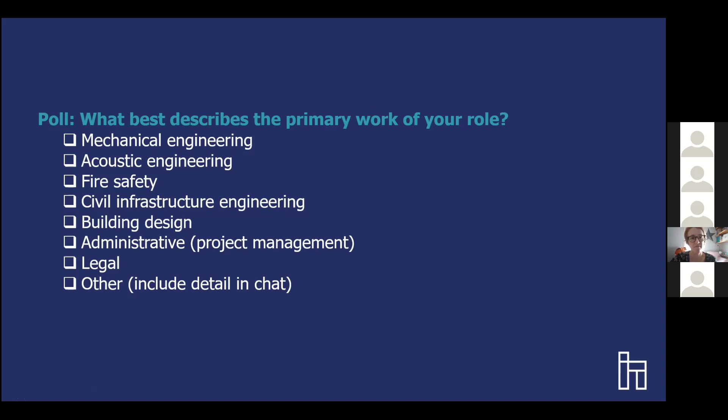I think this group probably knows the importance of focusing on buildings globally. Emissions from buildings and building operation represent close to 40% of greenhouse gases, but in urban centers like DC, where there are more larger buildings and more public transportation options, buildings represent a much larger share. We can see that in the district, this is 71% of emissions come from buildings.

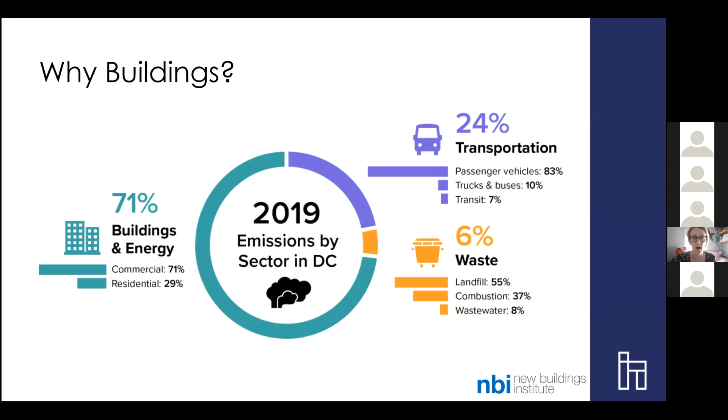Under Clean Energy DC, the district is committed to reducing annual greenhouse gas emissions and energy consumption by 50% and achieving 100% of its energy derived from renewable energy resources, all by 2032. Additionally, in December of 2017, Mayor Bowser further pledged that the district would be carbon neutral by 2050.

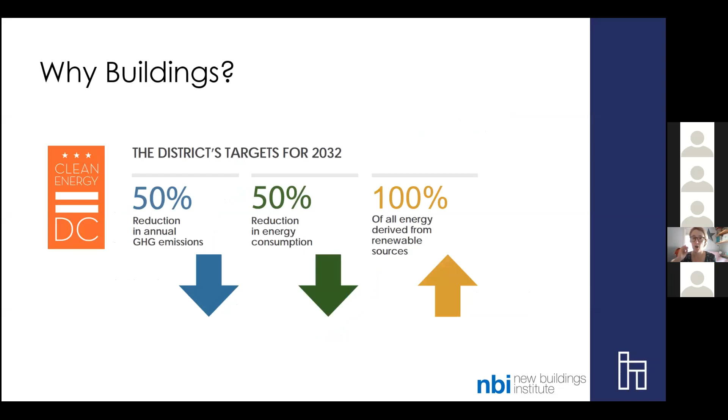30% of the projected greenhouse gas savings by that timeframe will come from building-related initiatives, specifically actions that require efficient carbon neutral new construction and expansion of deep energy retrofits. Exactly what we're talking about today: the combination of new construction codes and building performance standards.

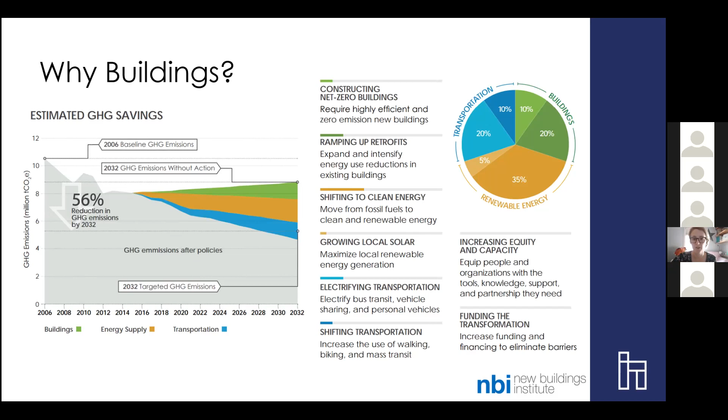The effect that the district and other jurisdictions, including now the federal government, have had in setting these sort of targets and goals has put an additional emphasis on talking about emissions in buildings, meaning that things like building codes and building performance standards are becoming mainstream and people are more aware of the impact that our buildings have on climate.

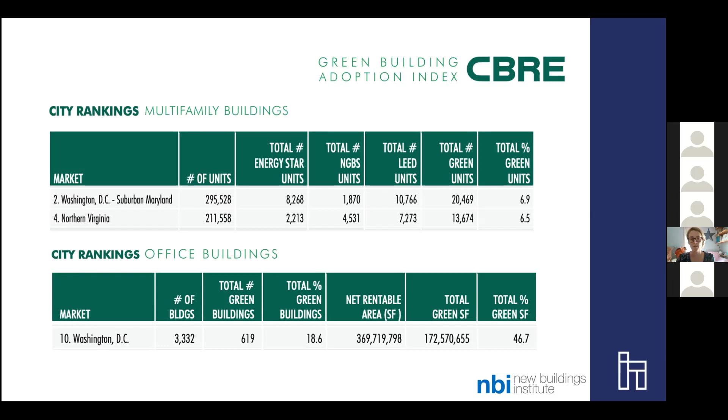We know that DC is already ranked as a top market for delivering high performance buildings. CBRE's annual report ranks DC and Northern Virginia second and fourth among top 30 cities in the country for green characteristics in multifamily buildings and 10th in office buildings. So not only is the regulatory infrastructure now in place to require high performance buildings, the market is used to looking for these criteria already when buying and leasing. So building owners who are asking for what their customers are demanding are going to increasingly be seeking those high performance solutions in buildings that they're purchasing or constructing.

So we know that the DC Energy Code applies to buildings as they're being planned and constructed, and that benchmarking and BEPS laws apply as soon as the building is delivered and reaches an occupancy threshold. A new building becomes an existing building as soon as it's built. So if you're required to benchmark, you need to start benchmarking the calendar year after receiving your CO.

And once a full calendar year of utility data can be collected, after a full year of benchmarking data has been reported, a new building will be required to meet the standard at the beginning of the next BEPS period. So this will be slightly complicated if we're talking about multiple buildings, but if you map a single building that you're constructing against this, then you should be able to map out those calendar years pretty succinctly.

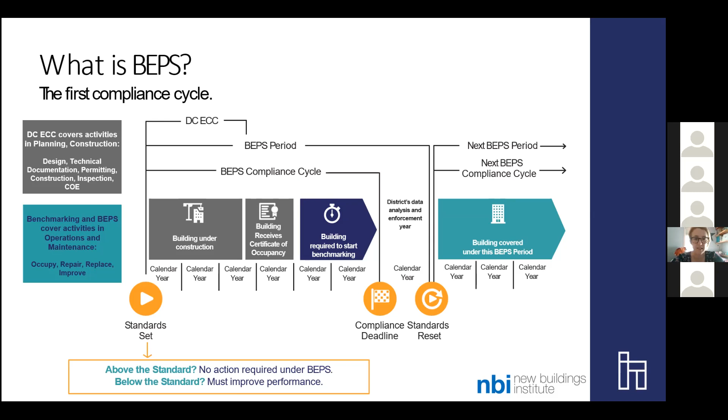DC Energy Code, right, in that first step. The DC Energy Code is a package of new construction codes that govern what's required in our new construction. Energy Code provides specific requirements for energy using systems in buildings. There are 3 paths in the Energy Code: the prescriptive path, modeled performance path, and alternate compliance paths.

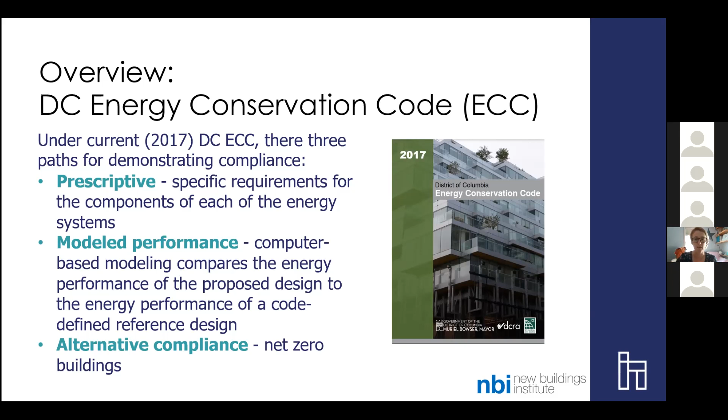Today, we're just going to focus on the first 2, not the alternate compliance paths, because they involve third-party certification. That's sort of out of the scope of this discussion, but the same types of application and consideration in either modeling or selecting prescriptive requirements could be applied to those paths as well.

At the highest level, the new Energy Code, the 2017 DC Energy Code, is built on top of 90.1, 2013, with amendments that were derived from the previous version of the Energy Code amendments that had been in place, as well as ASHRAE's 189.1, focusing on the energy consuming portions of that. The previous DC Energy Code was built on the 2012 IECC, again with some significant amendments.

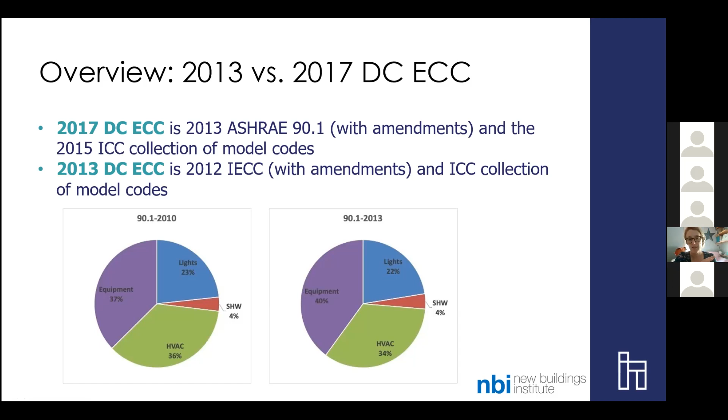The biggest thing to note in terms of building performance standards here is that when you compare these 2 Energy Code pies, what you'll see is that between the 2 code cycles, there's a 3% increase that I want to note in equipment. This is equipment and plug loads. As much as we can control lighting, water heating, air conditioning and ventilation in design, there's little to almost no way to control users during the design phase. So this, what was 37% and is now sort of 40% nationally across all buildings, is a really big opportunity for BEPS compliance that's going to have to happen after construction.

So the next piece along that timeline, benchmarking. DC was the first jurisdiction in the country to pass the benchmarking ordinance when it adopted the Clean and Affordable Energy Act in 2008. The law requires that large privately owned commercial and multifamily buildings and district government buildings benchmark their energy and water consumption using Portfolio Manager, reported to DOEE annually, and then the data is disclosed publicly.

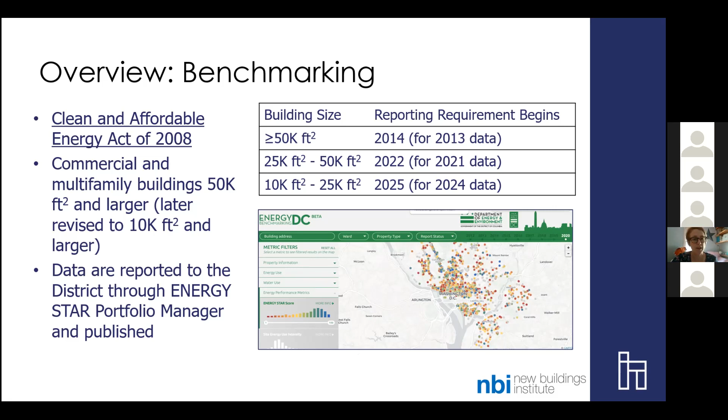And they have put out a series of maps so that you can sort of track Energy Star score by filtering by different metrics and compare yourself to your peers, or just understand where your building is, or if you just love maps.

Similarly, the building performance standard thresholds have been built into sort of an interactive interface. BEPS is a minimum energy performance target for existing buildings that is legislated to be no lower than the local median Energy Star score by property type.

Oops, went too fast. The district has, again, published this map. You can dive in. Right now, we're highlighting DC Hub's building, 1707 L Street, an office building constructed in 1960. The median Energy Star score for office buildings we know is about 71, and this building specifically had a score of 84 during the baseline year of 2019.

So by exceeding or meeting that Energy Star score, this building is considered compliant during this first cycle of BEPS and does not currently require any additional action.

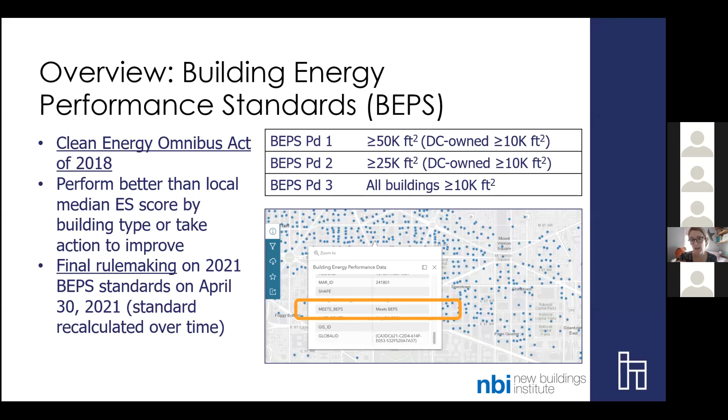Okay, so how are we going to try to figure out where the new construction might hit on a building energy performance score? What NBI did to try to figure out if new construction would be guaranteed to meet the building performance standard is we did 2 analyses.

First, we took the benchmarking data from the district and scrubbed it for data that we thought was usable. If you all have been benchmarking, you know that sometimes things get misreported. So we tried to take out buildings that we thought were either misreporting or had been missing a meter or something like that.

Based on having worked with some of this data before and other pieces of analysis, we mapped the site EUI, the source EUI, and the Energy Star score of those buildings. This graphic shows multifamily buildings that we think were built under the 2013 Energy Code. The way we chose that was we picked a construction date as a proxy. So construction dates between 2015 and 2017 were selected as that proxy when we completed this analysis.

And this is what it looks like. So what this graphic shows is that, broadly speaking, there's an inverse relationship between site EUI, source EUI, and Energy Star score, which we sort of expect because the Energy Star score is meant to estimate energy performance of a building, normalized for weather and other building characteristics. The lower the energy use, the higher the Energy Star score.

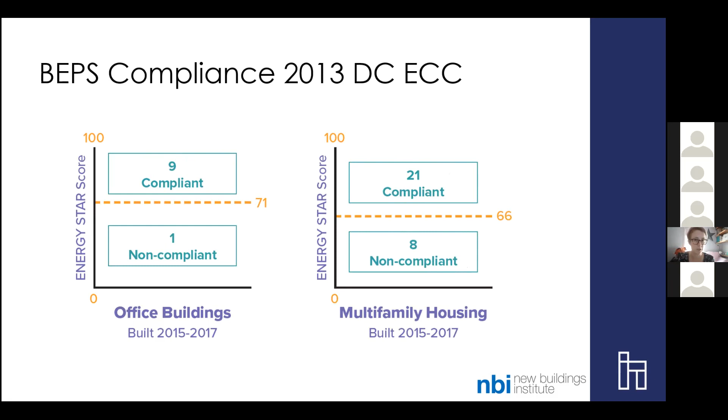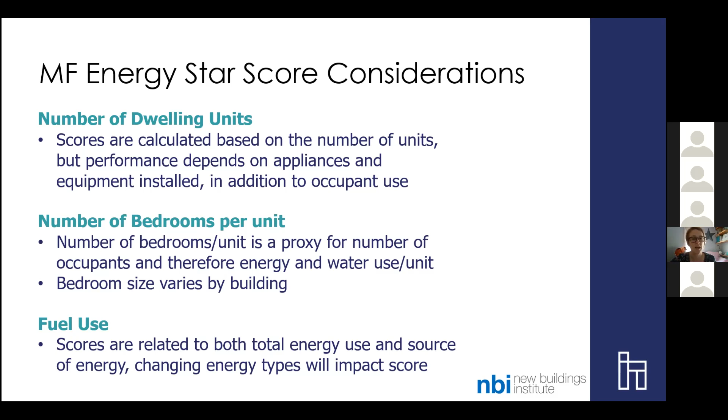Then we dove into the Energy Star considerations. The Energy Star score is based on an equation. It includes number of dwelling units, number of bedrooms per unit, and a little bit on fuel use. So your fuel use will impact your score, whether it's derived from natural gas, electricity, or on-site solar. All of those will change the score that you have.

So again, this is that same graph that I showed you before, again targeting that BEPS median of 66.

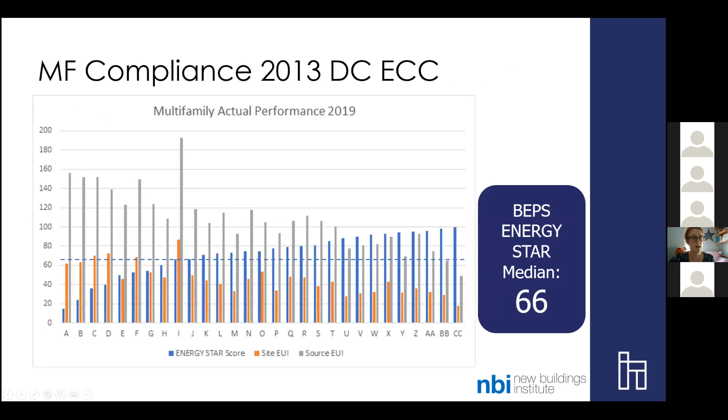And then we ran a test against what we thought the 2017 Energy Code would deliver. This is based on analysis completed by PNNL. Instead of looking across multiple buildings, because we did not have multiple buildings at this time, we took the PNNL analysis and changed the variables that Energy Star uses to normalize its scores. What we got was a variety of scores that may apply to a code constructed multifamily building.

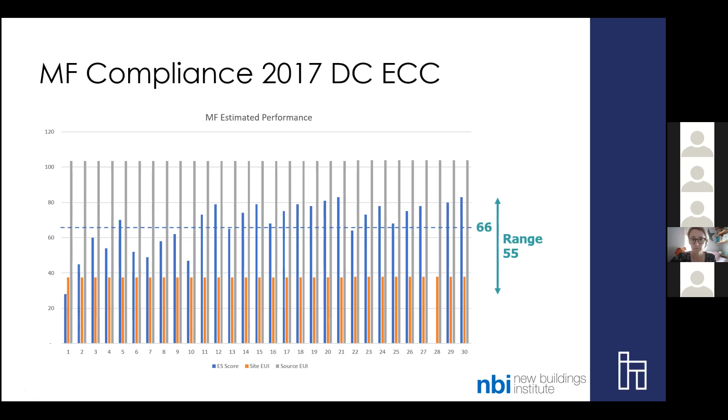You can see here, again, this is the 66 that we're looking for, and we have a range of scores of 55. So we go from a lowest score generated of 28, to the highest score generated of 83, just by adjusting the factors that Energy Star uses to normalize its data.

So what we did was a couple of things based on the PNNL assumptions that went into their analysis: the size per unit, and how many bedrooms. We also used a series based on Energy Star defaults, which we do not recommend you do for design characteristics, but for this type of analysis it made sense to change those variables.

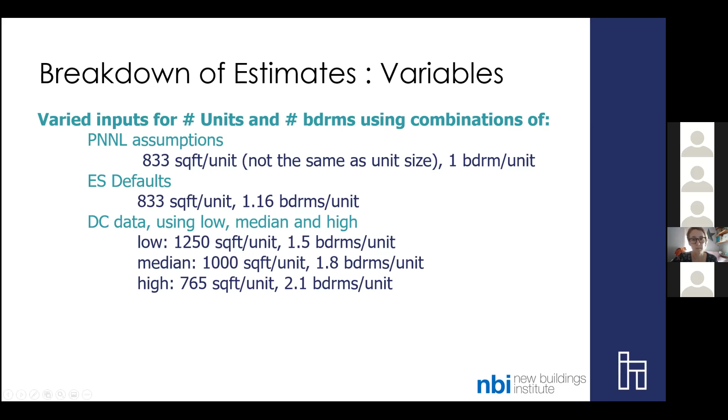And then we also broke down the DC data. So we used the DC data that exists, a low number, a median number, and a high number in terms of size of unit and number of bedrooms per unit.

Then we went through a similar piece with offices. Energy Star considerations for offices are a little bit different. Obviously there's no bedrooms, no units, but they have weekly operating hours, an occupancy number, and a number of computers, which plays into that plug load conversation. And then again, fuel use.

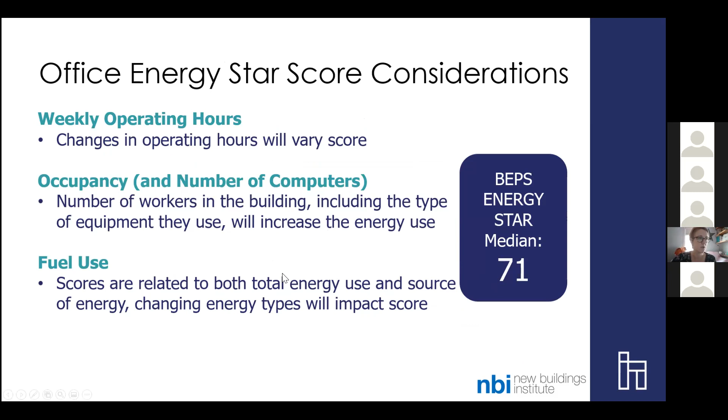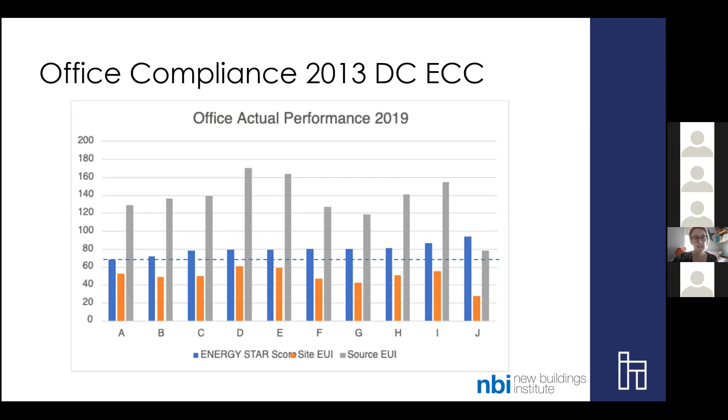So now we're targeting that Energy Star score of 71. Again, this is the existing buildings that we estimate were built to the 2013 DC Energy Code. We ran a very similar type of analysis to try to estimate for offices what the scores might be. In offices, we ended up with ranges much tighter together based on those variables present in the Energy Star calculation, a range of 16, with scores varying from 70 to 86.

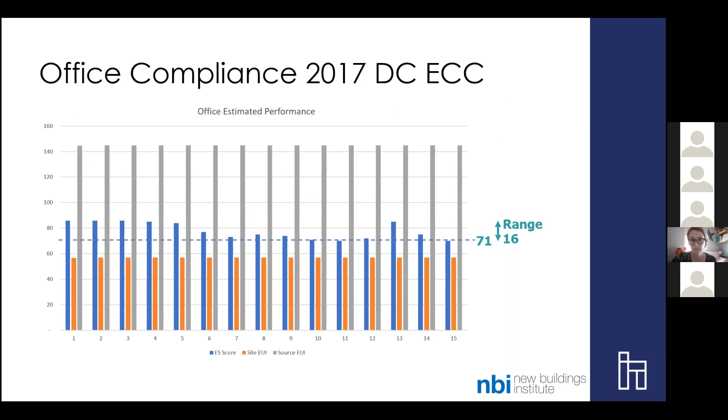Quick review of the estimates we're looking at here: we took the PNNL assumptions for operating hours and the number of square feet per person, and then we took the DC data, low, median, high.

The other piece I'll caution here is square foot per person. We started this analysis at the beginning of the time of COVID, and we know this variable specifically may not look the same going forward as it has in the past. But at the time of the analysis, instead of speculating about what office allowances would be for square foot per person, we decided to just use the historic DC data. The market will need to sort itself out, and this variable will need to be taken very seriously if there's a dramatic shift in the square feet per person allotted in new office designs.

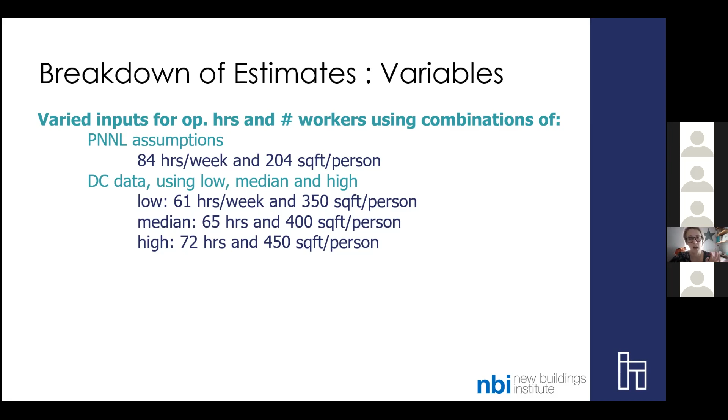Again, this is the energy use we were looking at from PNNL: electric from the grid, electric from solar, and natural gas components making up that analysis.

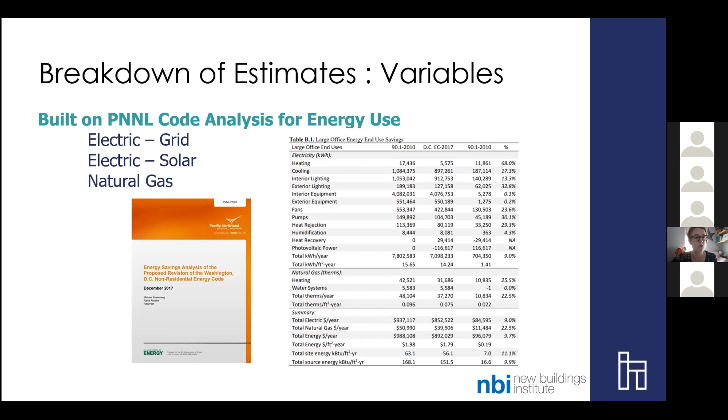So what we ended up with in this very hypothetical analysis is 13 compliant office buildings, 2 non-compliant office buildings. The asterisk on that 13 is that one of the office runs was exactly a 71, so that building would be compliant for this first 5-year cycle, but may not be compliant in a second 5-year cycle. Just flagging that.

And then in multifamily, again, the results are a little more concerning. We have 18 compliant runs, 11 non-compliant runs that would happen in multifamily.

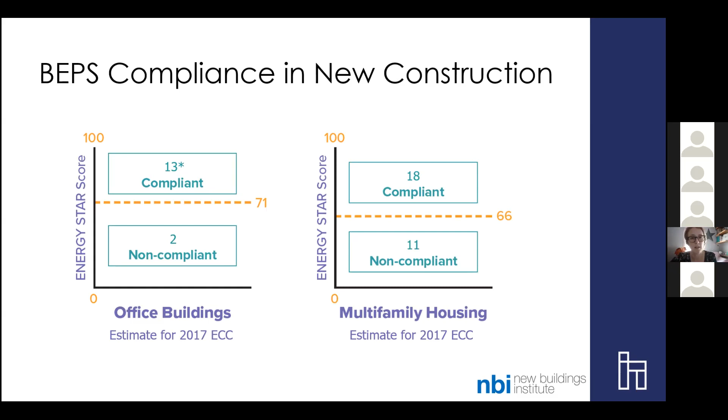Overall, we think that it is highly likely commercial office buildings built under the current code, the 2017 DC Energy Code, will meet the thresholds for BEPS compliance in the first BEPS period. It's obviously not a guarantee from the numbers we just showed, and it is quite possible that a code minimum would not give you compliance in the first round of BEPS.

It is also likely that long-term, as the standard were to change, that office building may become non-compliant.

Residential, it is less certain. These multifamily buildings have a lower degree of certainty that you will build to code minimum and meet BEPS even in this first cycle. The range we saw based on those Energy Star calculations and standardization is sort of concerning. So we really would recommend that residential buildings look very closely at design and construction considerations, taking into account initial first cost toward long-term compliance to BEPS.

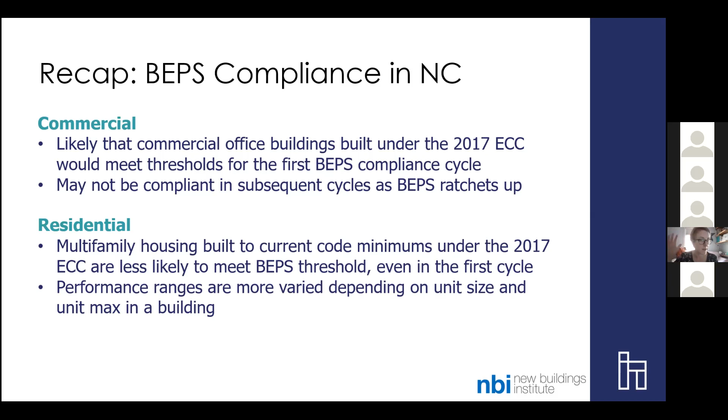30% of those buildings that we hypothetically analyzed would not be compliant.

Hey Kim, we have one quick question. So the question is: is the PNNL analysis based on the future building meeting the 2017 code via the performance path or the prescriptive path?

And I think what you were referring to is it just currently is achieving the minimum Energy Star score, correct? So would not be falling into a compliance path?

So I don't think I understood the end part of what you just said there, Teresa, but the PNNL analysis that was done for DC is the same way that PNNL does analysis for the national model codes. So they take into consideration sort of an average building.

So there's no one prescriptive path, right? You can use the prescriptive path of the code to build thousands of iterations of the exact same building, and they would all be code compliant. So it tries to assume that some variation of each of the paths will be built, and what would an average building built to these conditions show.

It's also based on the PNNL model prototypes. If people are familiar with those, they did amend them slightly for the district because unlike when they do a national analysis, there is less variability in DC's buildings, smaller footprint. We sort of know the building stock that exists and have a good sense of the building stock that is going to come online. So there were some tweaks made to make the model prototypes more like DC's buildings. I don't know if that answers this person's question.

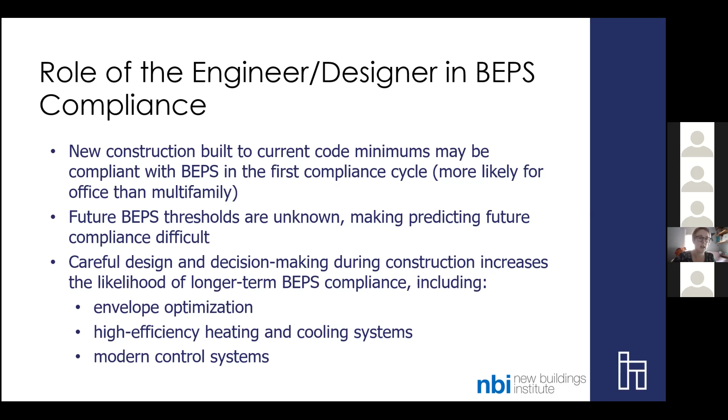There are specific things that we know can be done that are the same things we've talked about in energy efficiency for years: envelope optimization, high efficiency heating and cooling systems (not the federal minimums), and integrating a lot of modern control systems so that the building is able to be operated very well. It's not just about how good the system is itself. If the building can't shift or change in relationship to an operation need, then you haven't set up a building that is going to be strong in BEPS compliance.

All right, let's dive in here a little bit. We'll talk about prescriptive path considerations, model performance path considerations, and then I'm going to mention again that unregulated loads are a very large piece of the puzzle here.

The energy code does include some load regulations. There are requirements, like in offices, for plugs that can be automatically turned on and off. DC has gone out of its way to understand how requiring Energy Star appliances can help reduce those plug loads, but it's still a large load in the building that has to be dealt with at the user level.

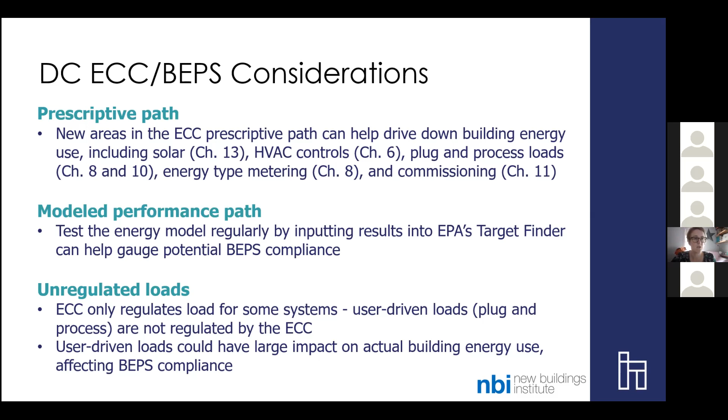Prescriptive path considerations - I said thousands of iterations, but my slide notes say two buildings using the same energy code following the same prescriptive path can have wildly different actual performance outcomes. That's because the prescriptive path isn't a single path - it's a choose-your-own-adventure through a series of prescriptive measures. So you can have two buildings that both have less than 30% window to wall area, but one has 1% and one has 29%. Those buildings are going to operate very differently.

So trying to optimize that envelope means dealing with window area and the materials you're selecting - what is the R-value of the walls you're installing, what is the air leakage of the building you're building. All of these things are going to be really strongly tied to long-term performance. We know the envelope isn't going to change much over its lifetime, so getting those decisions right at the outset is really important.

System type: the prescriptive path considers all HVAC systems equally code compliant as long as you meet the federal minimum efficiency. But we know you can buy different efficiencies in things like furnaces or heat pumps. So how you select the most efficient system for your building is going to have a pretty long-term impact. We expect those systems to last not quite as long as the envelope - anywhere from 20 to 25 years. Hopefully your envelope lasts for 100. But that 25-year period is going to take 5 BEPS cycles, so how are you setting that system selection up to have the best performance over those cycles?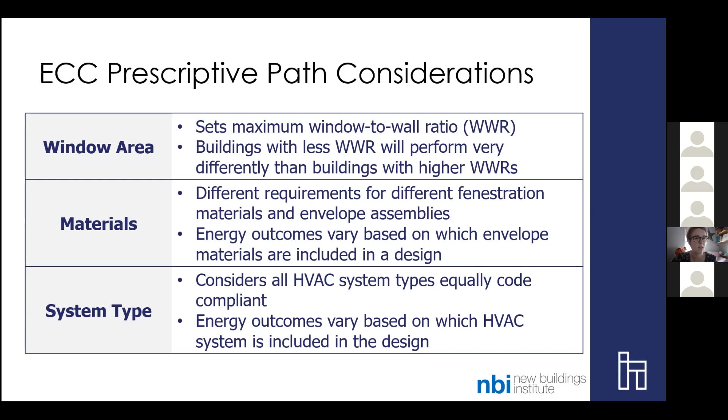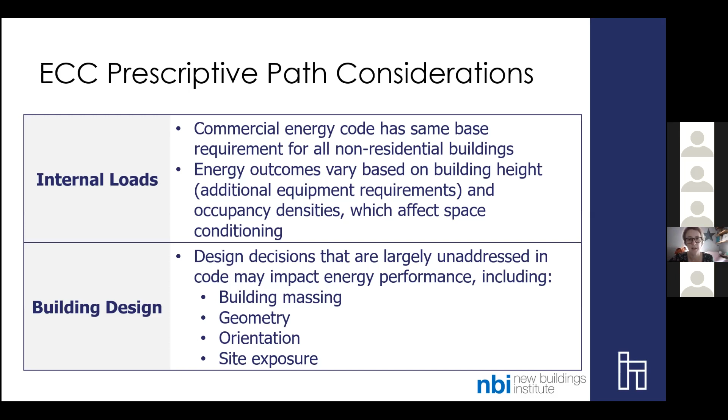All of those can also be taken into the performance path. I want to be very careful here to remind people that the performance path is a comparative model - it is not a predictive model. All it does is say, if I built this building and compared it to a very similar building that met code prescriptively, do they use about the same amount of energy? Neither of those buildings is a real building, so the performance path is not meant to be predictive.

Although I will say that if you're doing a performance path calculation, you should consider, as you go through those modeling exercises, starting to plug those into Energy Star Target Finder, because it will give you a better sense than no sense at all of what your Energy Star score might be.

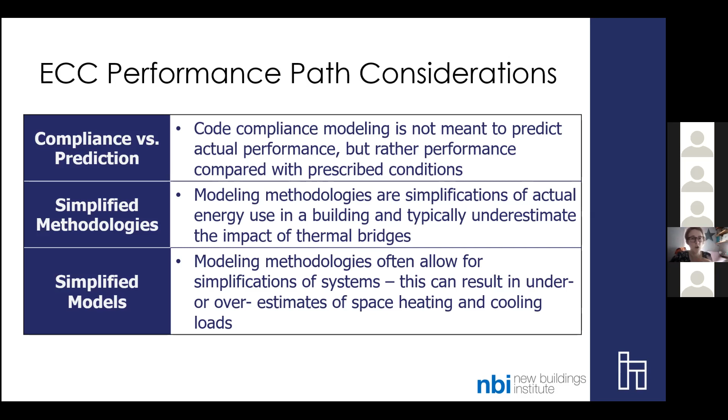As you're working with engineering teams like Arup and others that have done a lot of building construction, ask them to go back and say, do you have data from previous buildings? Do you know what the actual plug loads are? Can we plug that into a target finder assumption, as well as the data from the predictive compliance modeling? Using that as an iterative process will help ensure you're on track. It's not a guarantee.

Building operations and operating schedules are really going to be important in the performance path to meet code compliance. You should try to tailor those to get an energy output that is as close to predictive as possible. It will not be accurate.

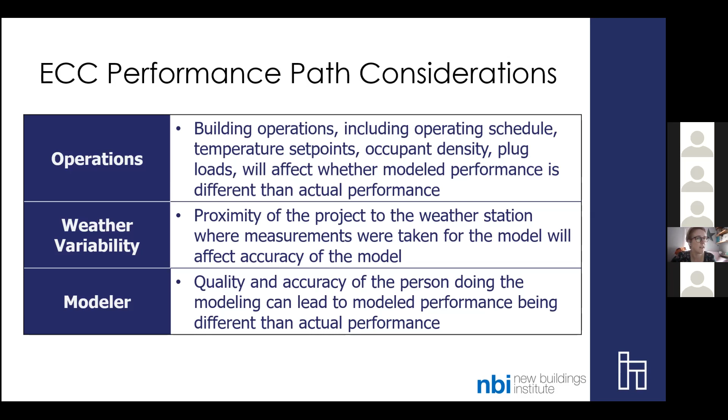Proximity to a weather station impacts how the model will react. And quite frankly, the quality and accuracy of the person doing the modeling can produce wildly different results. So I always recommend working with modelers you've worked with in the past. As a previous code official, if you're getting a lot of comments back on the modeling, there's probably more errors in there than you'd otherwise expect.

Additionally, the performance path relies on a baseline building, and that baseline depends largely on the type of building. So you can have a lot of ranges within the baseline you're comparing to. Window to wall area ratio for that baseline building is anywhere from 6 to 40%.

Since we spent a lot of time talking about office and multifamily, the HVAC system baseline is also important. Office uses a VAV system, multifamily uses PTAC. Both will impact energy cost, which is what the performance path is about, but is not what your Energy Star score is about.

Same for service water heating. Office uses an electric resistance baseline. Multifamily actually uses a gas baseline. We'll talk more about that in a second.

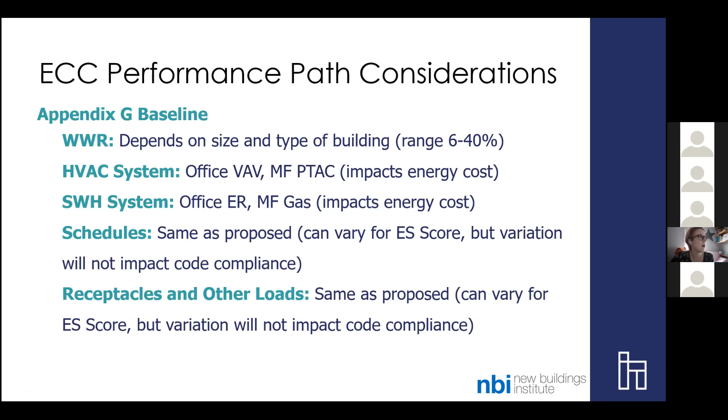And then the schedules. Again, the schedule of your performance path building is going to be the same as your proposed building. So that schedule is not going to impact your code compliance, but it is going to impact your Energy Star score. Same for those plug loads - not going to impact your performance path, but it is going to impact your Energy Star score. Knowing how these variables fit in and are different will hopefully help you steer through what to do.

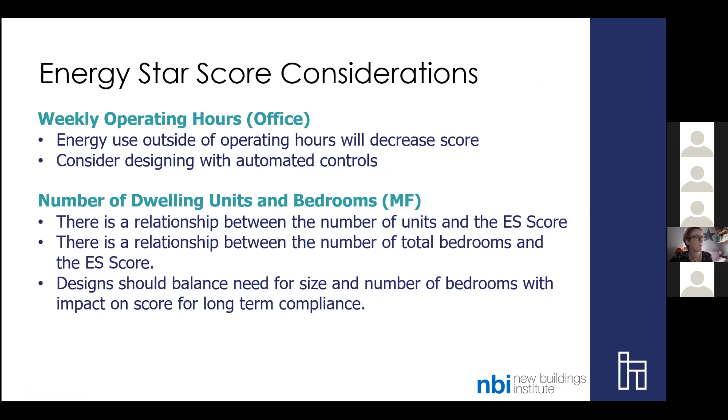Talked a little bit about this before, so we'll move forward here. One thing I'd like to flag specifically, because we're going to dive into a look at a multifamily building under consideration, is fuel choice.

I said this before, but I want to drive this home: fuel choice will impact your Energy Star score. Understanding what it means to select an electric system or a gas system, or provide on-site solar - which is now a minimum requirement in the DC Energy Code, and also has additional options for the Green Code - can also help you comply with stormwater and green area ratio requirements. These will have an impact both on your code compliance and your BEPS, as well as potentially some of these other DC policy areas.

Long-term planning - aside from the generic, what's in the code, how can it help you comply? We've done other analysis, not related to BEPS, but related to what targets may be approached for new construction and existing buildings. This is a chart combining analysis that NBI has done, as well as analysis that Steven Winter Associates has done, looking at new construction: what do we think is a zero energy target, or an optimized building, and how much can we reduce energy use intensity across different building types, comparing it to 90.1 2016, what the code would have given you.

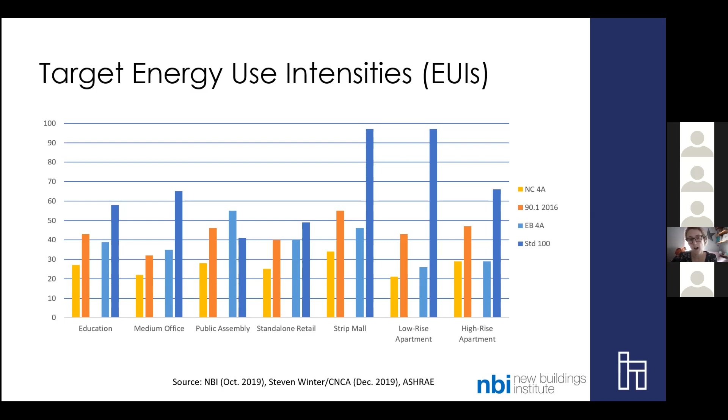Additional beyond-code considerations: transportation infrastructure. We talk a lot about electric vehicles increasingly. One key thing I want to point out is that if you are putting electric vehicle chargers into your building, it's very important to sub-meter that load. I think we just saw this in Boston's building performance standard release, that the only way to subtract electric vehicle charging out is to have it sub-metered. So I would strongly encourage any electric vehicle infrastructure to be sub-metered.

That is not a code requirement. It is going to be a best practice for you to get those loads out. It will impact your Energy Star score.

Distributed generation, rooftop solar, like we just said, is partially a code requirement, is partially helpful in meeting other district policy requirements. Grid integration, focusing on real-time energy management - having the building automation system and other controls in place to make sure that your building can respond to utility signals, may or may not lower your overall energy use, but it will set you up in a way that you can have better control of the building overall, which should help the operations.

And then making sure that operator training and new guidance is given at building delivery. Again, there are some requirements in the code around commissioning and things like that, but operator training is not a code requirement.

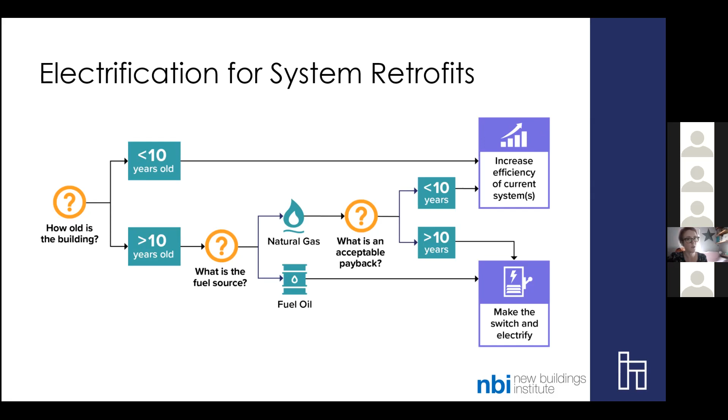So while I'm going to try to cap this at just a couple more minutes and leave some time for questions - electrification considerations that seem to be really important in the new construction space.

I mentioned this a little bit before: performance path, the baseline building. HVAC, office uses a VAV, multifamily uses a PTAC. Both of those are electric. Water heating, the office uses electric resistance, the multifamily uses gas. In terms of Appendix G, because it is based on cost, that gas impacts cost savings when you switch those buildings to an electric water heating system.

That's the code piece, and Energy Star's in a negative way, right? So switching - maybe I should just be more pointed on that. A multifamily system that has an electric water heating system is going to be less code compliant than a multifamily building that uses gas water heating. And it's something that we're working with the district to address in its next energy code.

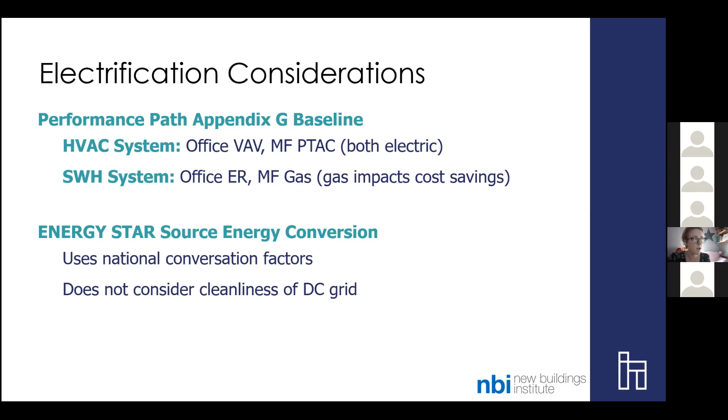The Energy Star score uses a source energy conversion factor, but it uses national factors. So when you look at your Energy Star score and that source energy, it's not based on the cleanliness of DC's electric grid. It's based on the national average of the electric grid. So we're not fully accounting for carbon or the benefits of electrification in either the code or the building performance standard.

So when we took a look with another group that was looking to build a new multifamily building in DC, we went through a couple of options - and I know this is a little chart, maybe doesn't mean all that much to anyone - but they tried a couple different options for moving things to electrification. So they tried to put in a water heating electric system and a space heating gas system. We can go into what these mean one-on-one, maybe with some of you a little bit better. But what this shows across the bottom is how code compliant the building was.

Just using the 2017 current DC code, the building was negative 29% compliant, which means not compliant, right? You need to be over 0. Using the new version of ASHRAE 2019, still we were about 11.5% non-compliant. If we used a carbon building performance factor, which is the way ASHRAE is now using to calculate the energy code compliance under Appendix G, it sort of just barely eked out. And then if you looked at using site energy, you were compliant, right? 3.3%.

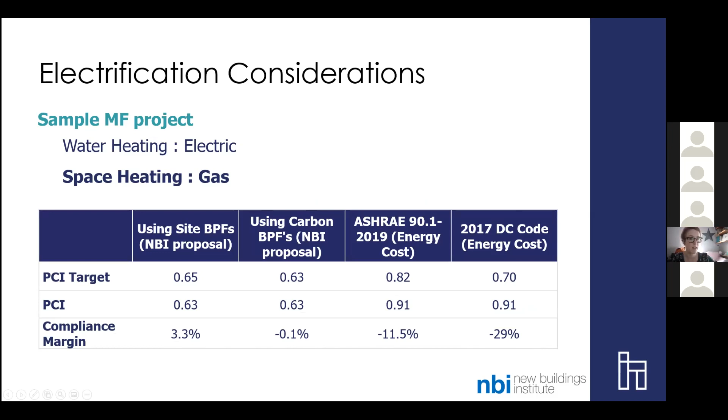Again, these are 4 different results for the same building, just based on the calculation method we use. Two different results, same building - swapping out the water heating system is going to change your Energy Star score. I would say that this 95 is going to ensure long-term compliance, but discounts the impact of the carbon being emitted.

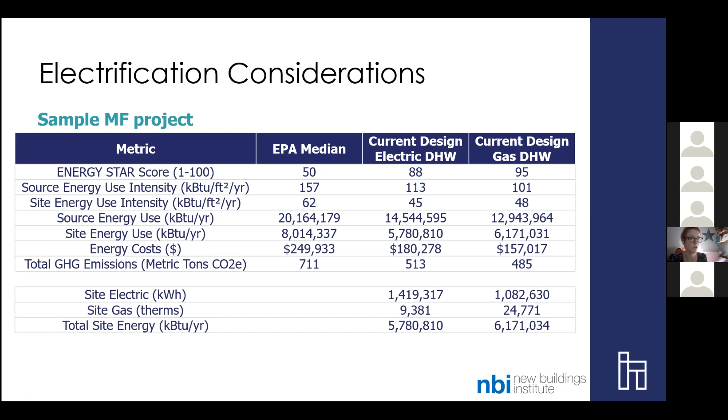So you're in sort of a tricky place in the district right now. And I don't want to underemphasize the fact that these numbers are coming up in ranges that make it a little bit difficult for you all to do your jobs very well.

And with that lovely note - I said at the beginning we had resources. The hub has put out a series of wonderful resources on BEPS and electrification, trying to understand what it means to be building and renovating in this district. NBI is constantly updating our resources, both through tracking buildings on our Getting to Zero database, as well as putting out new targets and other metrics for building owners and designers to consider. And then there's a series of other resources from national and international sources that we think are really good at driving people towards zero emissions, zero energy, in both new construction and retrofit.

So with that, I will turn us back over to Q&A.

Thanks, Kim. We haven't had a lot of questions here, but I did want to read out one comment that says: thanks Kim, great content that paints the reality of developing in DC right now. It's fair to summarize by saying a 'compliance only' mentality in DC now is not going to cut it. The AEC industry needs to make the switch from a compliance to a predictive-based approach, with all of our eyes set on net zero energy.